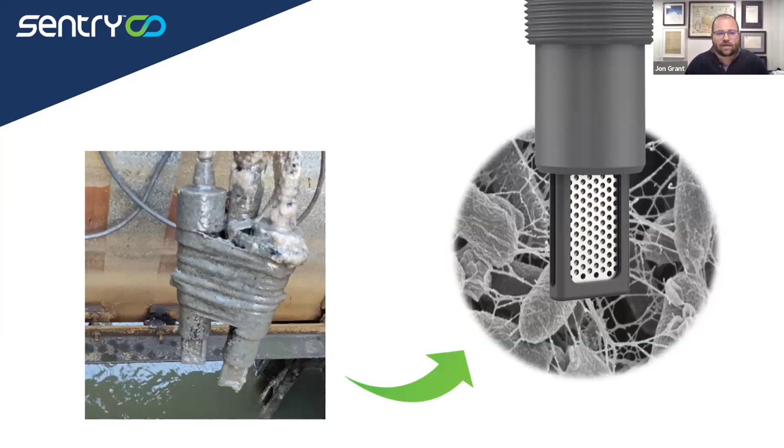And why is that? At its heart, if you look at that's an expanded view of this tip right here, you can see through it. When we think about wastewater treatment, biofilm is consuming carbon. That's all it does for a living. And that powers all biological treatment processes.

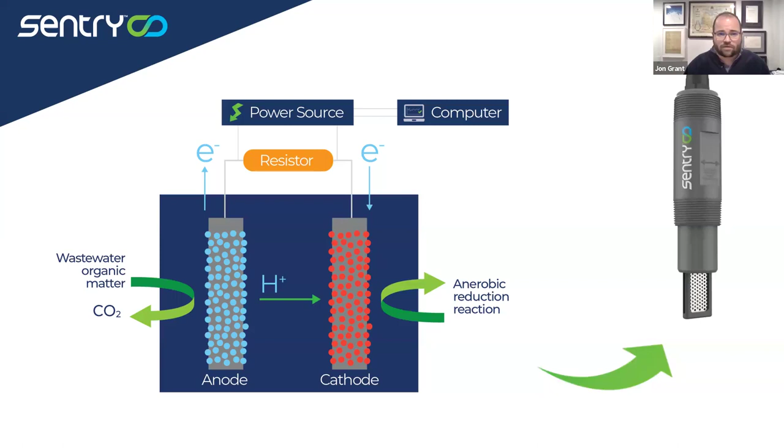What we've done here is, if you look at the architecture and are familiar with microbial fuel cells, this is just a microbial fuel cell where, rather than trying to generate energy from it, we're counting that flow of electrons. As the biofilm consumes carbon, it deposits electrons onto our probe, and we count that—that's how basic biological electrode sensors work. Ultimately it's basically like a Fitbit for your plant's ability to treat the incoming wastewater. That becomes a very powerful tool, and we can talk about how it's being used and applied by a number of different groups globally.

Again, what does a bioelectrode sensor measure? There are so many different ways to measure organics: COD, TOC, BOD5, CBOD5. What this is really measuring is the consumable part of BOD, or in the case of a digester—those are the two main applications: influent variability monitoring and digester optimization.

It's monitoring at what rate the biofilm is consuming food. It does compare very favorably to a BOD5 lab sample—very similar to RBCOD. We've been tested against pretty much every type of organic metric, and where it differs from something like BOD5 is if there's an industrial discharge that's toxic. The lab sample will be the same number, whether there's a toxic shock and an inhibitor or not.

But a bioelectrode sensor will still pick up that the plant is less able to treat the incoming wastewater. So it becomes very powerful for real-time operations and decision-making, almost like a supplemental tool and a way of the biology telling the operators on site or remotely that there's an issue and that possibly a change needs to be made.

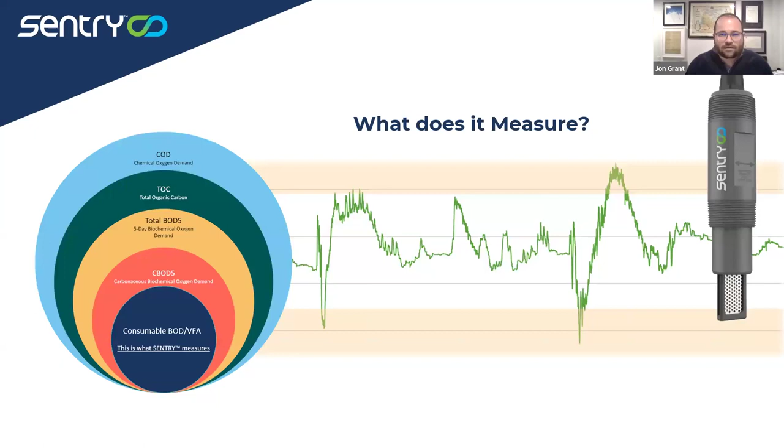So what does it actually look like? This sensor takes a reading once a minute. A normal, happy plant with no industrial discharges, no inflow and infiltration issues, is going to have a nice diurnal trend—kind of like how there's a flow diurnal trend.

But it doesn't take a lot for an industrial discharger to mess up a plant. At our home plant, just near our headquarters in Prince Edward Island, there's a town of 3,000 people, and a microbrewery will throw off their treatment processes. So it doesn't take a lot to knock it off kilter.

This plant right here can very much look like that plant, and the flow is the same. The smell may even be pretty similar, but the outcomes are very different, and it causes the operators and the operations team to possibly get a bunch of flack for something they may not have caused, because you don't always know what's coming into the plant.

One of the fun things we've learned through monitoring around the world is there's one universal truth for almost every wastewater plant in the world: if there's an industrial discharger in there, they will discharge at 4 o'clock on a Friday, and it hits the plant between 5 and 6, and everything goes out of whack—and it messes up your dinner, depending on when you eat dinner.

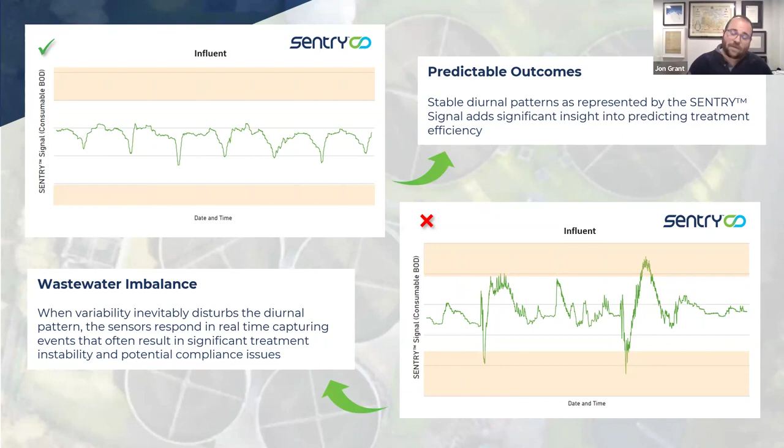So how it's used - there are 3 main places that we've deployed these and seen how they've been effective. If there are a number of industrial dischargers that cause issues, you can put these in collection systems, pre-treatment sites, and lift stations.

They do need power, and they help identify much further in advance what's coming down the line. This has been done in places like Phoenix, and it's going into Salem, Oregon. Singapore PUB is probably the largest such deployment I've seen, with 6 industrial dischargers, 3 lift stations, and then at the headworks. It's interesting to see how a big spike or toxic shock flows through and gets diluted out, but some of them don't, depending on the strength and/or time of day.

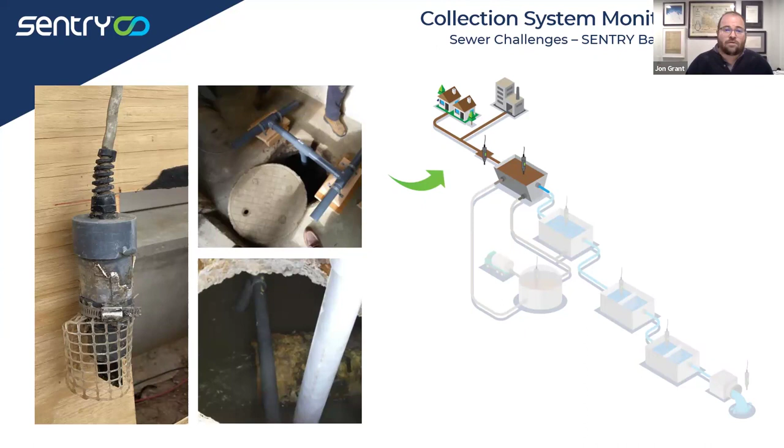So what we're looking at here is industrial dischargers just hammering with toxic shocks, cleanouts of tanks. It could be any sorts of chemicals, heavy metals, things like that.

And then conversely, industrial discharges with organics - we are deployed downstream of a Red Bull plant, and it's very cool to see that Red Bull also gives the biology in the plant wings too. They love it, it supercharges their day.

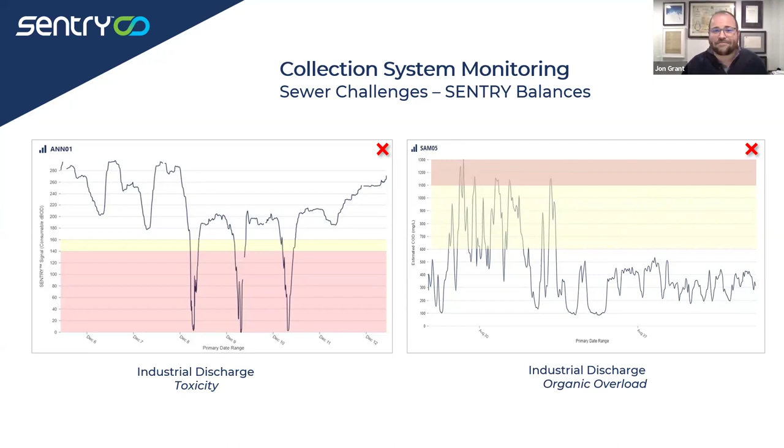Most common use that we've seen is influent monitoring - headworks or primary clarifier, depending on the configuration of the type of plant. Mounted in a tank, mounted in a channel - that's really the best place to monitor for any optimization or understanding of what's coming in, because essentially the clarifier headworks location is the extension of the collection system, but it's also the furthest forward point in the plant.

Great question, Erwin - sorry, I'm seeing that, so I'll throw the answer in right now.

FOG will have an effect on it. I can actually show you how FOG interacts with it, or how FOG additions interact with it with anaerobic digesters. When installing this type of sensor, it's great as long as it doesn't get bags or rags on it, or if there's odor control, ferric dosing, or hydraulic dead zones where FOG can build up, because really they're designed to be in the flow, with the biofilm on the surface able to consume a representative flow. Hopefully that answered your question.

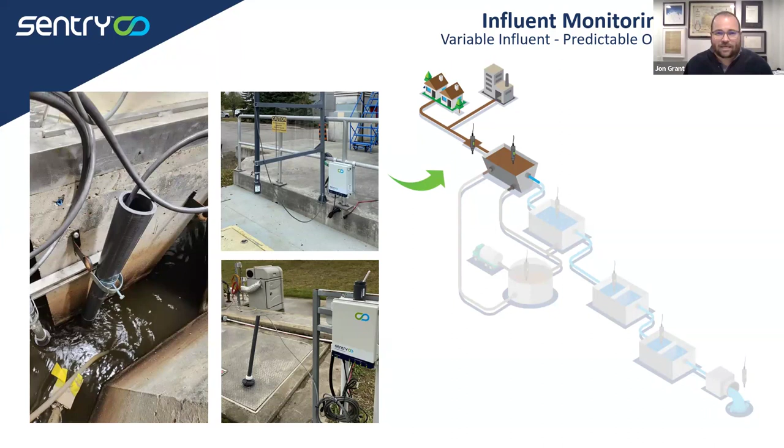So at an influent location, you can see a lot of different types of patterns and different issues - high organic loadings, you can see that spike up. Industrial discharges that have some acute toxicity, you can see that coming down. And then dilution from rain events.

In the standard operating procedures developed by the engineers and folks we've collaborated with, the first question when there's a low signal, to diagnose the issue, is: is it raining? Then there's a series of cascading questions based on whether or not it's raining, and how to treat the incoming wastewater and potentially make changes.

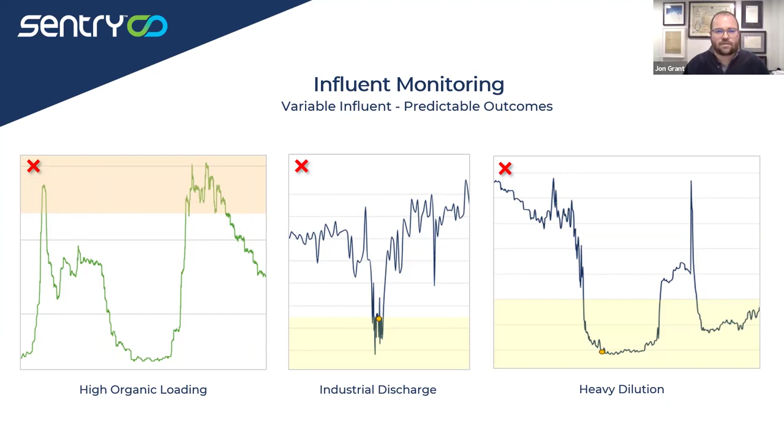Our team, and I'm sure other teams at other groups, are developing machine learning tools to quickly identify what type of issue is coming down and being picked up by the sensor. There's a number of case studies that the groups have used.

I'll dive into the Frankfort one in a little bit, but Sewer Authority Mid-Coastside in California - they're reducing their non-regulatory sampling by 80% because previously they just relied on sampling at 9 a.m. every day. You're going to pick up whatever was happening at 9 a.m. every day, and that may not pick up the things that cause plant issues.

Peterborough, that was a fun one - they're actually just up the road for me. Their plant turned blue, which could be toxic. So their historical method of dealing with that was they'd ramp up aeration, they'd start sampling, they'd change some chemical dosing, but a couple of times we picked up that it was just food coloring from a food production facility, and food coloring has no impact on treatment, so they were able to save quite a bit of cost and time.

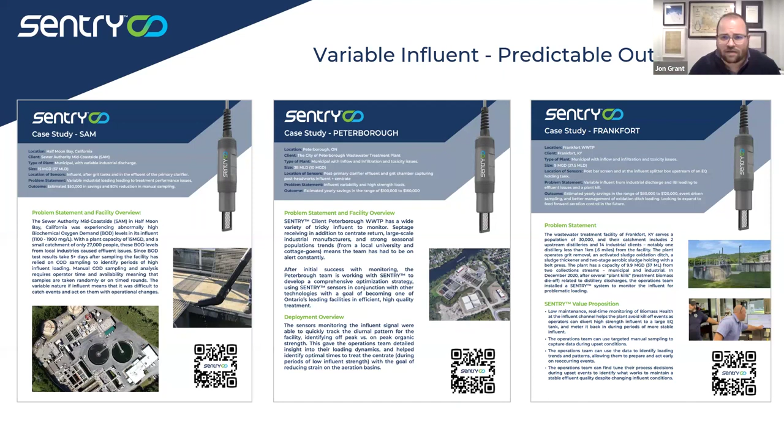And then I'll dive into Frankfort for anyone who likes Buffalo Trace - that's where they make that.

They're also being tied into auto samplers - so this is an ISCO auto sampler, and this is a Hach auto sampler, because it's a challenge to sample when there's actually an issue. That's historically been something where random sampling or composite sampling doesn't actually pick up the acute issues that are happening, and when they're happening, to trace them back to the folks who are sending them down in our catchments.

So the other most common use is digester monitoring, looking at digester health. First off, looking to prevent any souring events, because downtime, souring, and reseeding costs too much money. And the others are then to optimize biogas.

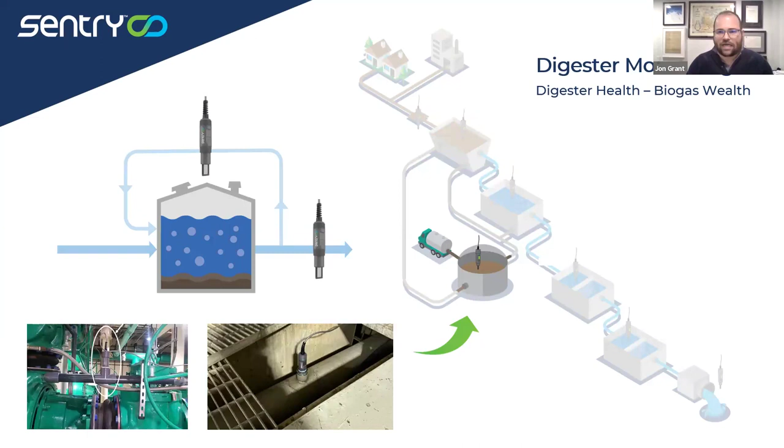This type of sensor is very useful because it's a leading indicator of biogas production, since it's essentially monitoring that consumption of VFA, which allows for a very good understanding of biomass health and whether it can take in the organics currently being discharged to it.

So what that looks like in digester monitoring is this: this is what happened when a system was restarted. Rather than having to load, test, wait three days for a VFA analysis, load, test, wait again, it can be done in more real time. This was done in agricultural digesters, two in Ontario and one in BC, to understand the effect.

The other interesting point is that because it's a leading indicator of biogas production, it's great. As you're driving more and more organics loaded into the digester, those two signals will match. It's when they diverge, when biogas production plateaus and the signal for organic loading still goes up, that's the maximum loading that can be done within a digester.

So then it's all about setting the risk tolerances, 10, 20%, whatever the tolerance is for the specific plant, to a point where it can be monitored and optimize that renewable energy. It's also been used to prevent digester souring events and pick those up earlier than other types of tools.

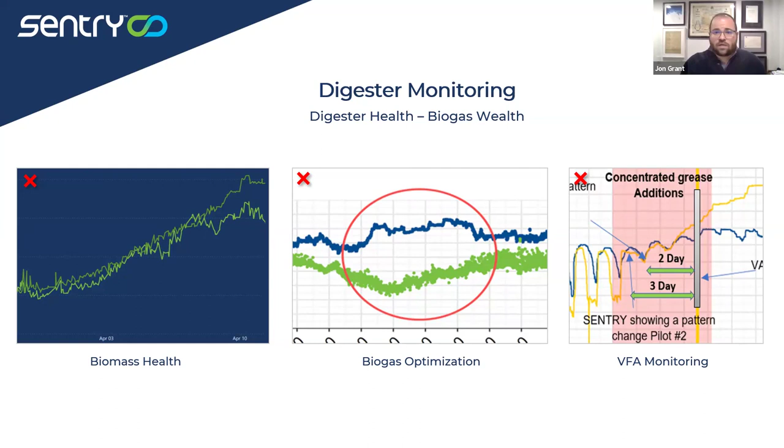In short, when looking at a real-time signal over the course of days, ideally life is good and it's in a good band. But the second that organics start to ramp up within a digester, it's time to start taking corrective actions at a certain point, and immediate actions if it gets to a certain high point, or if toxicity gets in, taking countermeasures to prevent that from destroying the biomass health.

Any questions before I jump into two case studies and how plants like yourselves are using this?

You mentioned something about the fluctuation in near real-time monitoring of signals, I may have missed that. Do you have some of these challenges in terms of fluctuations in the real-time data with the signals, as it were?

Great question. So the fluctuations, it'll pick up whatever food is available to it. What we have seen is, if we're right near a pump, we'll see the pump cycles, the pumps turning on and off. If we're on a recirculation line, we'll see that, because the bugs just want food, the same as how your plant will operate. They'll just want that food.

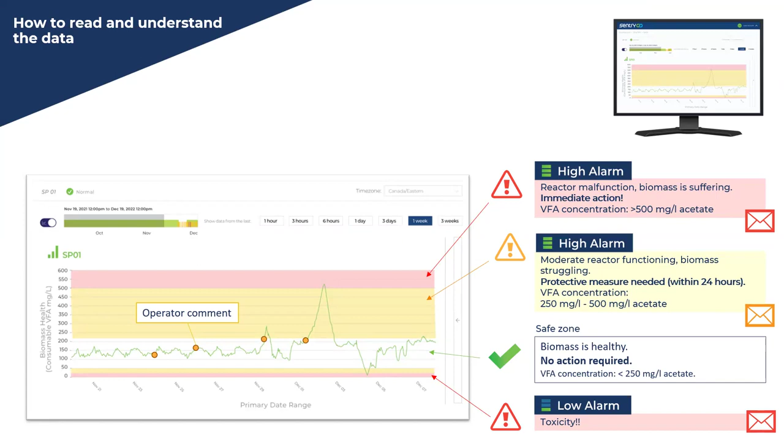Perfect. So let's dive into Frankfort, Kentucky first, and then SAM. Frankfort, Kentucky—not Frankfurt, Germany. When I present this to Germans, they love that. It's home to Buffalo Trace, one of the world's largest bourbon distilleries. Obviously I love the rum down in the Caribbean.

So this plant has 14 industrial dischargers, and Trace is the biggest. They discharge 150 meters or yards from the inlet of the plant. It's a town of about 30,000 people. They do have other dischargers, but really just one massive one.

So what happened for them was, about two months before we started working with them, they had a plant kill. Trace discharged something—they didn't inform the plant, or forgot to. There are varying stories on why the plant wasn't informed. But the plant manager walked in and could already smell and see that his plant was killed. And so for two and a half weeks, they were in violation.

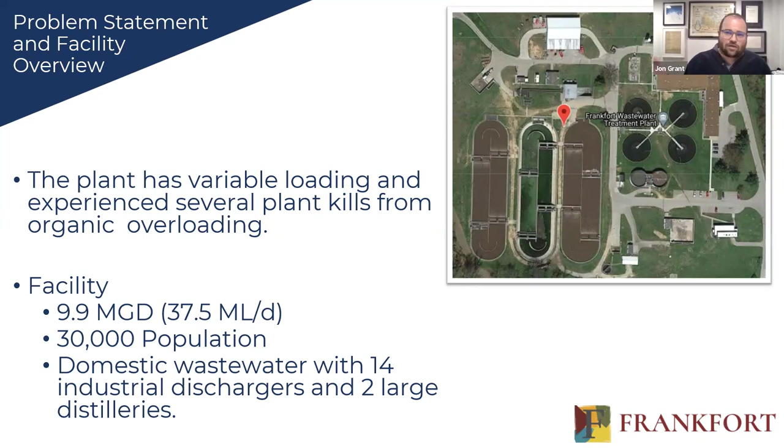So he talked to a partner of ours, and the rationale for looking at BES was the reliability and real-time monitoring to optimize their sampling, identify their loading trends, and then fine-tune some process decisions as well.

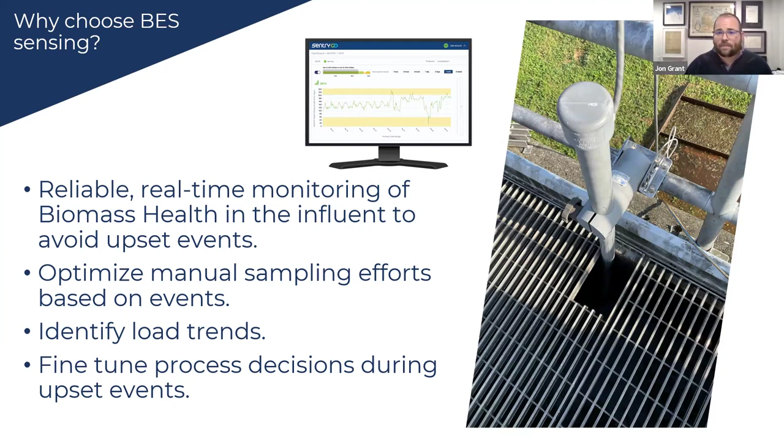And what this helped them do was the ability to see what was coming down from the distillery. So a small spike here from a discharge, fine. A big organic overload there, that's indicative of something that would actually cause them quite a bit of issue.

And this plant suffers quite a bit from rain dilution, though it's funny because they also suffer from snow melt. Probably not an issue for anyone here. But there was one time early on when we were deployed with them in the spring where we called them up and said, is it raining at this plant? And the comment was, no, it's warmer and all the snow is melting.

They also, in the first week or first month of working with them, had a big issue every Wednesday at noon. The reason they were having this issue every Wednesday at noon was because they were taking in landfill leachate at one of their lift stations, and the collection systems team wasn't talking with the plant team, so no one knew that.

They were also cleaning out their EQ tank at the same time, so they were basically double hitting themselves, and they couldn't figure out what was happening or why they were having these issues until they were able to sit down and have that conversation with the whole team and say, what's happening at 12 o'clock? So they shifted the landfill leachate receiving to a different time, and that enabled them to smooth things out and not have to spend more energy and consumables on treating it effectively.

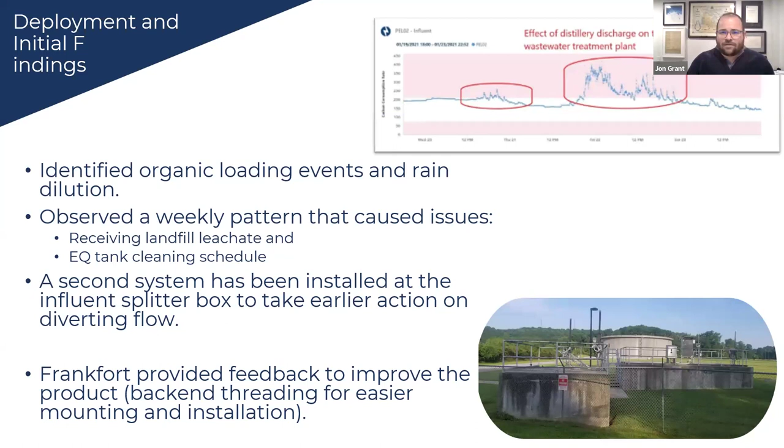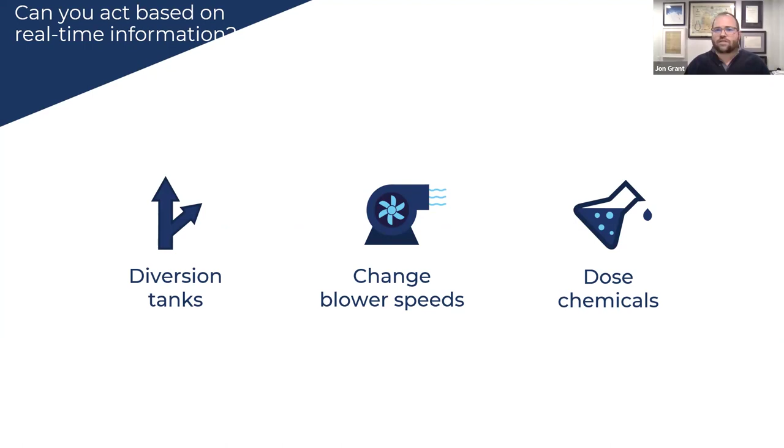All right, so typical uses: they will divert, change their blower speeds in their oxidation ditch, dose different chemicals. With this plant, and there's Carl, their plant superintendent, looking at the dashboard, they found that they were able to manage their oxidation ditch more effectively, and they're in the process of looking into feed forward aeration control to further optimize that. They're saving about $100,000 a year through using this tool, and they're also looking to put one right at the outflow of some of their larger dischargers like Buffalo Trace.

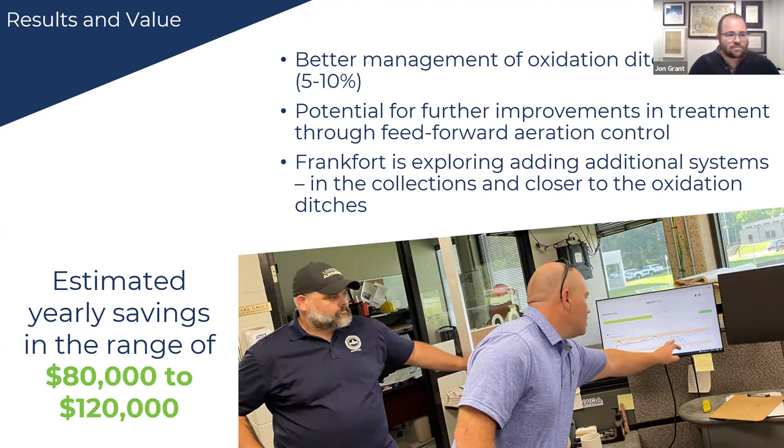I'll hop into any questions on that, or I can hop into a case study on co-digestion and the use in AD. Hearing none.

Great. So Central Marin Sanitation Agency, that's based in California near San Francisco. The plant as a whole began operations in 1985. They've got two 1 MGD mesophilic digesters, and they have a strategic power delivery program. Their entire goal when they upgraded to co-digestion a few years ago was, one, to be self-sufficient in production of energy, and two, to sell excess energy onto the grid. California has had issues historically with brownouts and lack of reliable energy, so this was another way to continue to add energy to the grid and provide a source of extra income for the municipal treatment plant.

It's no secret that every treatment plant in the world could use more money, and so they're able to use that to supplement their cost of operations and improve their plant more, or at least that was their goal. We'll get to the point where they are able to do that. We've been working with them for 4.5 years now.

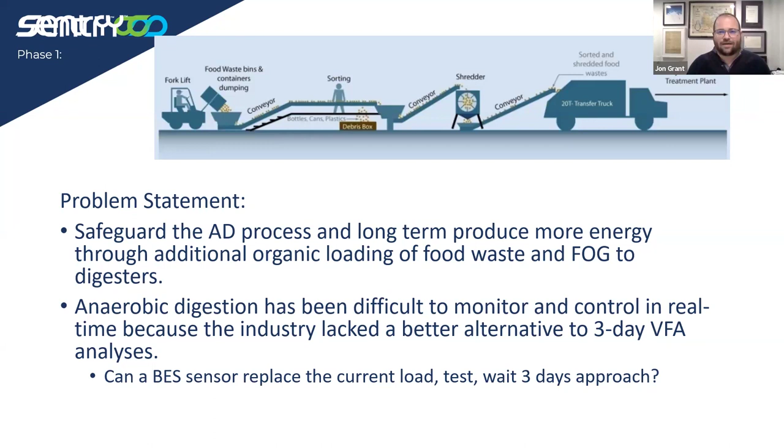In the first phase, it was to identify if these sensors could be used to protect biomass health, and then see if it could help monitor organic loading in real time. The second phase was to use the sensors to monitor that loading in real time and begin to load more organics. We're past phase 2 now, and we're moving into phase 3 to understand if digesters can possibly be loaded beyond the 50% more loading they've been able to achieve through real-time monitoring.

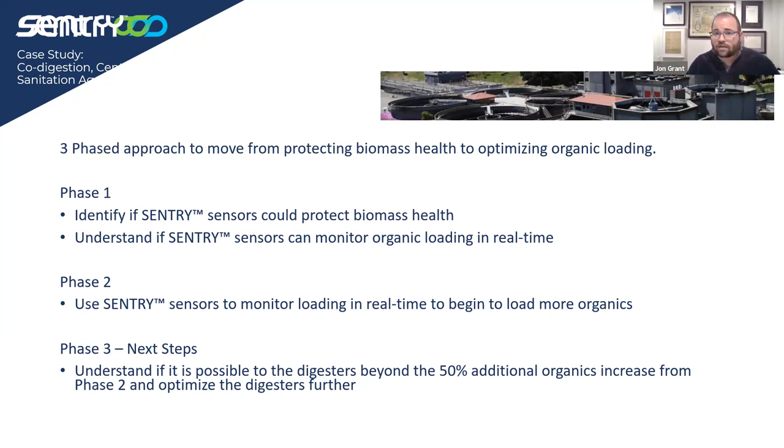In the first phase, they put 2 probes on the 2 pilot digesters. Pilot digesters are much safer to play around with than the real ones. They were deliberately trying to overload and sour the digester with organic loading.

What you're seeing here are the 2 digesters, loading, consuming all the food overnight, loading again, and the bioelectrode sensor picked up 3 days in advance of VFA that something was off. Looking back, it likely would have been earlier, because even though the peaks remain the same, if you look, the troughs are trending upwards. So what it's saying is that the biomass is struggling to recover and is starting to take on issues.

This one was fed all the way through just to confirm, and you can see that they went pretty off. But that gave the confidence that this type of technology could be used to help monitor that.

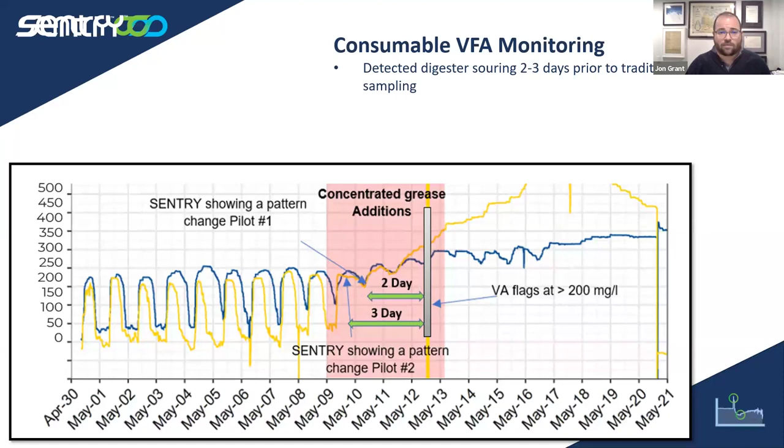We're naturally conservative because we have to be with digesters and wastewater treatment in general. But with digesters, if you get it wrong, there are so many issues you can have that it's not worth getting it wrong. So typically, digesters are loaded 30% less than they could be because of that risk tolerance.

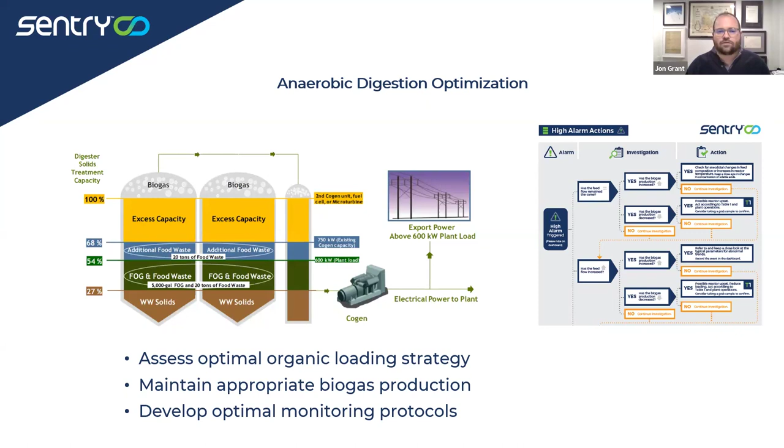The next phase was basically moving to phase 2, assessing the loading strategy and developing custom operating procedures for that site, to really maintain biogas production. Sensors were able to proactively identify instability, and again show that they could, at the very least, protect against digester failure and downtime.

Then, as they moved to the full-scale digesters, the goal was to increase organic loading to divert organic waste from landfills and ultimately generate biogas. So it's almost a double win: getting paid tipping fees for taking in truckloads of organic waste, and also generating excess electricity.

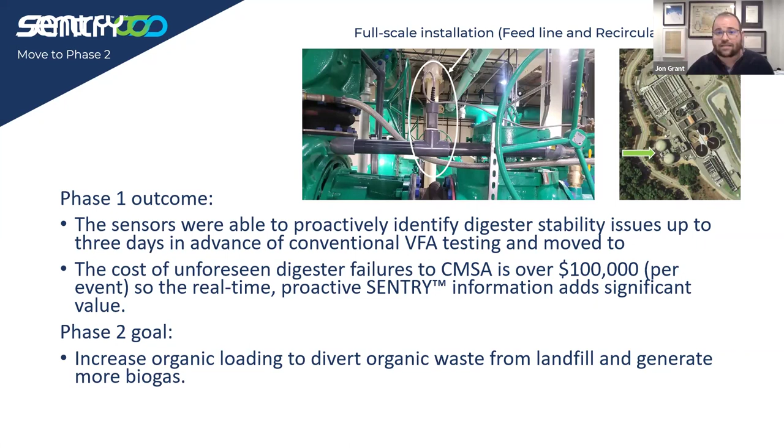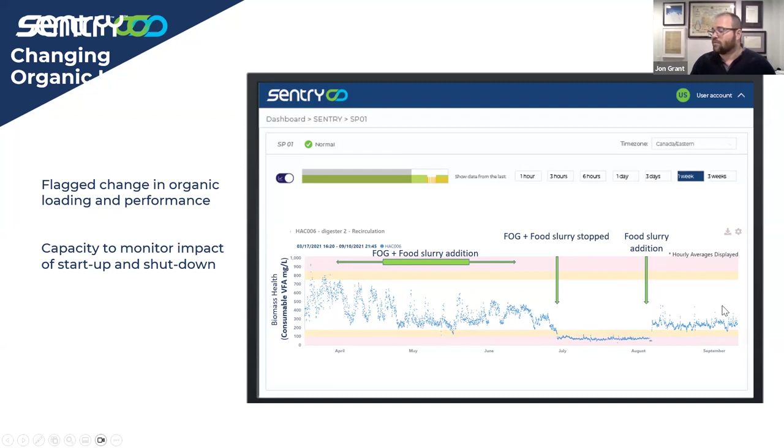If that was all that was coming in, you'd never have much variability. But again, the goal was to increase organics addition to generate more biogas. So they started doing it again, with just the food slurry at first, to start getting a good baseline of how to ensure they're starting this up effectively.

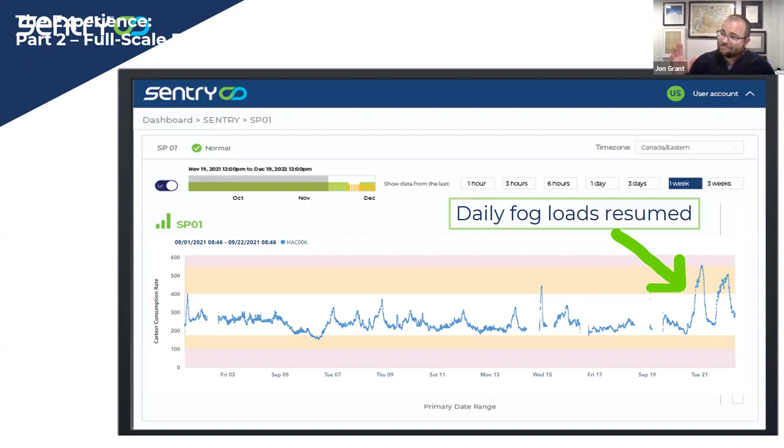Then this is a more granular look. They started to load fog again, and you can see that the biology and biomass within there likes to eat fog, it's much more active. Taking that one step further, they started loading one fog load every three days, and then began to take in one truck of fog per day, which allowed them to have that trust to push through.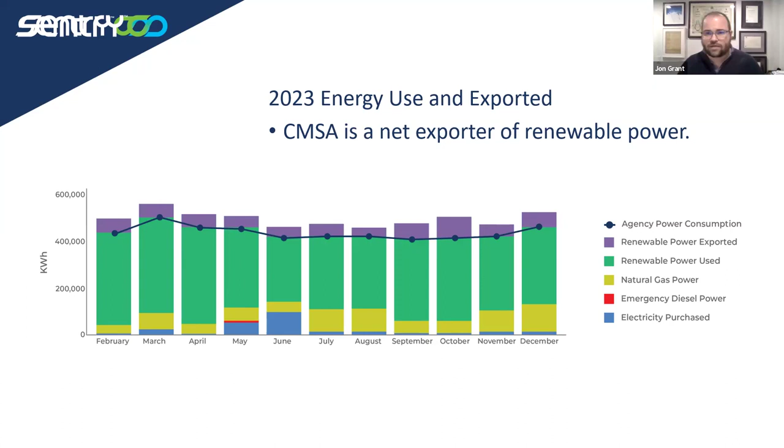So we're a few years on, and now they're able to say that they've been loading 30 to 50% more organics for a year, producing quite a bit more renewable power that they can export. The green line is the renewable power used, and the purple is the power they're able to export. The majority of their power is coming from these digesters, allowing them to sell back onto the grid.

So the ultimate outcome was: phase one, cost of downtime imbalance, $100,000 able to protect. Phase two, in conjunction with Stanford University, able to increase organic loading 30 to 50%, which led to a doubling of biogas production and about $600,000 in additional energy, either through not having to buy energy or selling it onto the grid.

So any questions there? Those are the two case studies. Happy to chat about those. A few slides left, and then we can take more questions.

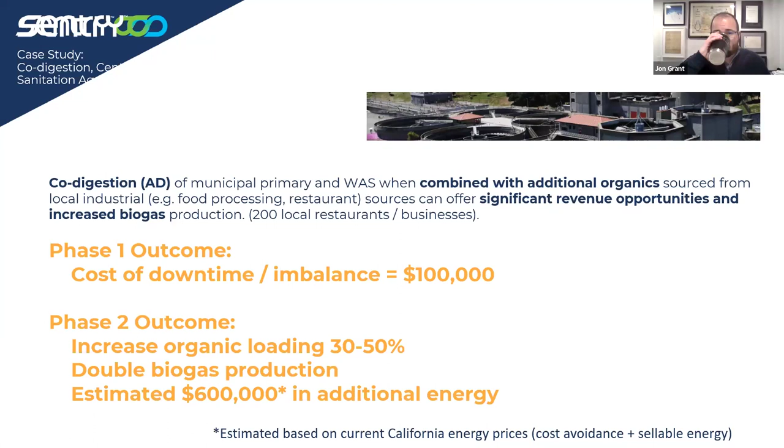Seeing none. So they're easy to install. I've installed them before, and anyone will tell you that means it's pretty easy. It plugs into a wall outlet, so standard North American plug.

The second that happens, the universal SIM card starts sending information to the cloud, and you're able to see that data live in real time. The most typical installations are either tank or channel mount, or threaded into a pipe. I've installed them in 35-40 minutes, which again speaks to how easy they are to use.

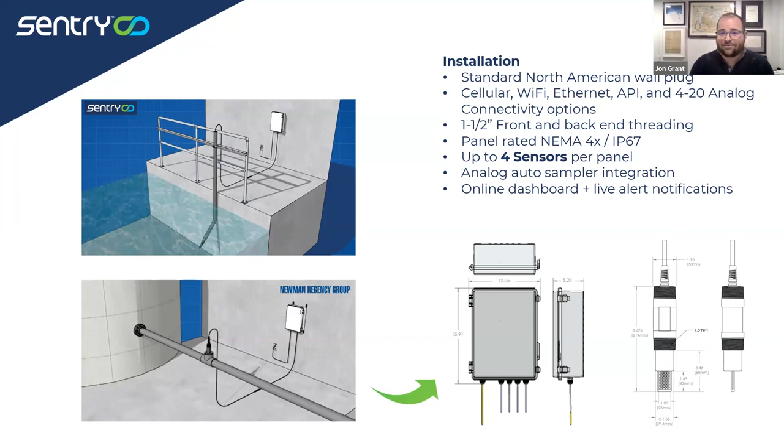A standard system comes with two sensors, because that way you can look at the beginning and end of a process and see how the treatment performed. It goes back to the roots of wanting to monitor a package treatment plant at the influent and see how that performed at the effluent, when it was out in the desert in Algeria, and being able to monitor that back in Canada.

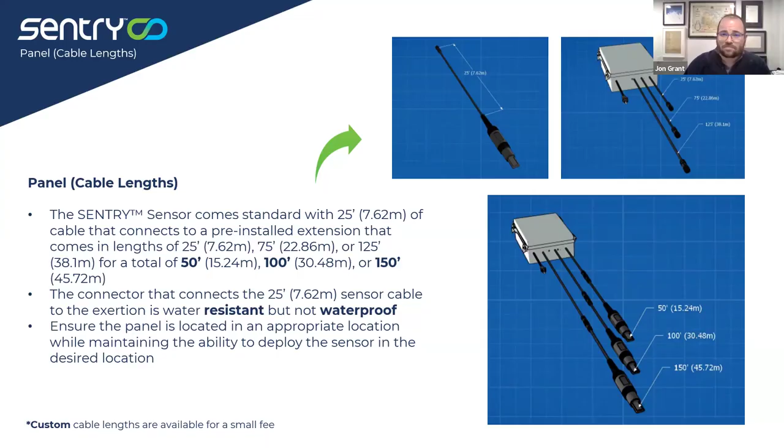So you get quite a good wingspan, in terms of 150 feet in any direction with cable lengths. Like I said, installation's a breeze.

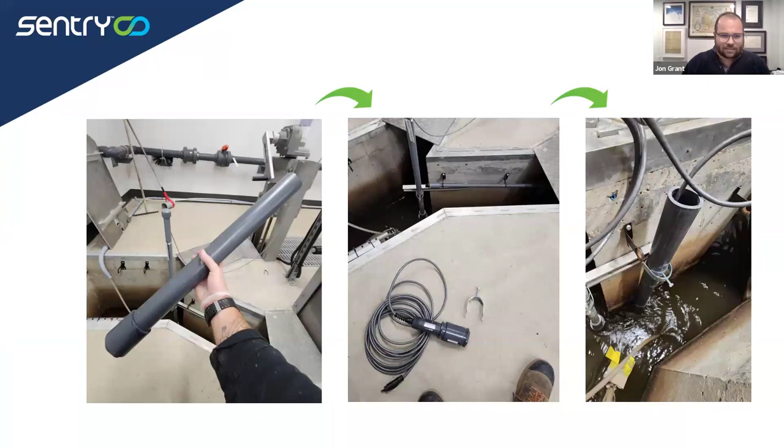And cleaning is the key thing. Like I said earlier, this type of sensor wants to be in wastewater. If, however, you get something metallic lodged between the two electrodes, the easiest way to clean it is squirt water between the two electrodes and get that out of there. Otherwise, we send a box of toothpicks inside the panel, which, if we forget to tell people, leads to a bunch of questions as to why we're sending toothpicks to a wastewater plant.

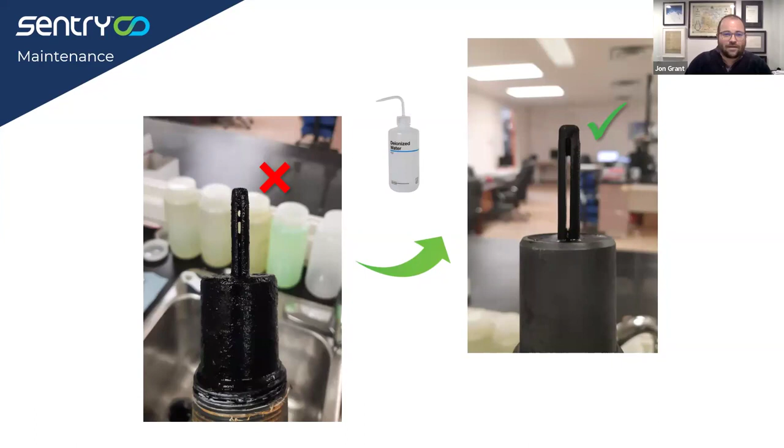Yeah, it's being used in quite a few applications. Aeration optimization - we're doing some feed-forward aeration optimization with a few partners. Nutrient management, effluent monitoring, auto sampling, industrial discharges, and starting to develop more on the machine learning and AI insights and reporting with ourselves and partners.

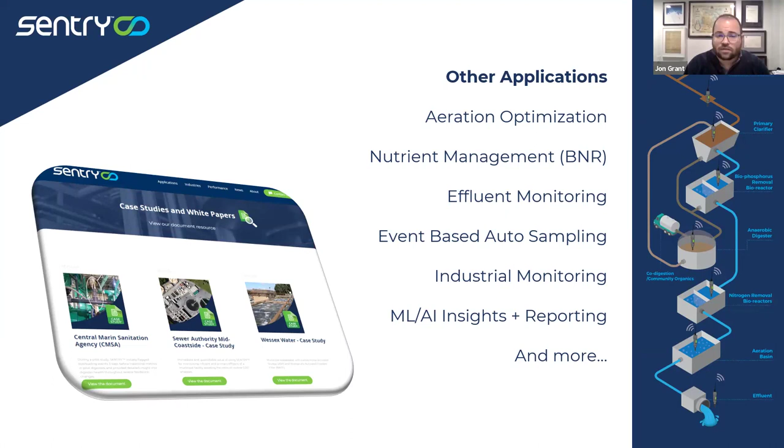Yeah, I mean this is just a quick - I'll skip over that, but essentially when this is deployed, it's deployed with the equipment, but also training online through smart people like Iker, who's on the call. They essentially act as an always-on person to support your operations team in making decisions, because there's 6 or 7 people on our team who all day, every day think about this signal.

Every treatment plant is unique, but the problems that treatment plants face happen quite often across the world. So there are some really smart people that work in this field that folks we collaborate with are able to call on at any given time. So that's about it - the goal is to know early so you can act. Happy to take some questions, and thank you for having me.

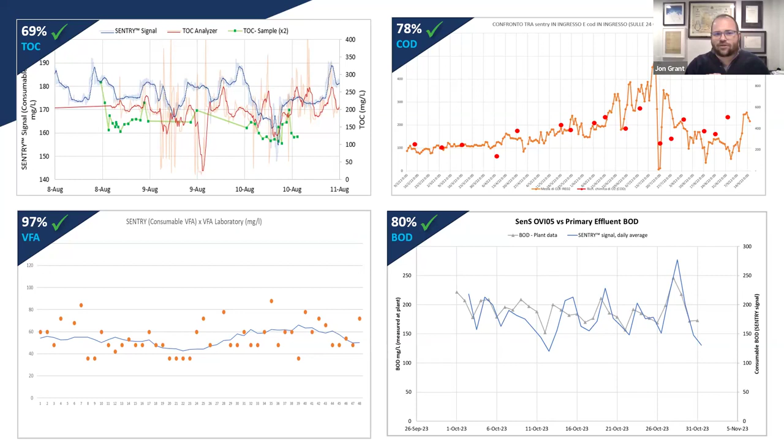Did that answer the question? I went a bit more in depth. I can show you the longer deployment here, where you can see the screen grab of the two sensors moving in lockstep after they were deployed. That was the one I was discussing early in the presentation.

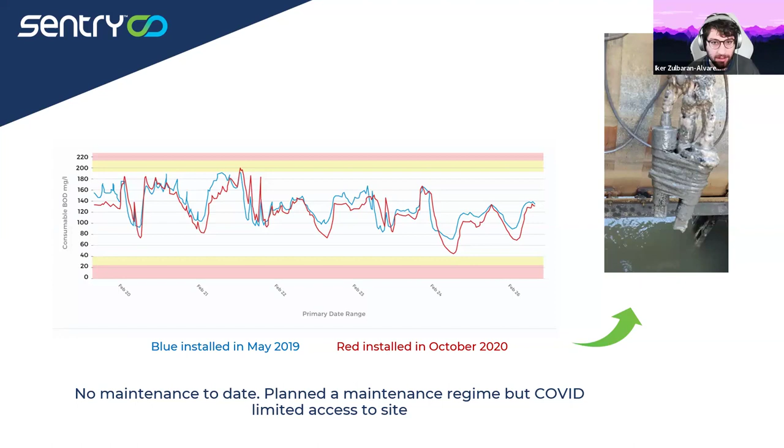Iker has also responded to a question in the chat asking could you review the application in activated sludge. For organic loading detection and trends, figure out if there are high loads of organics or toxic materials on its way to the basins. That's basically what Jon explained, just put into words.

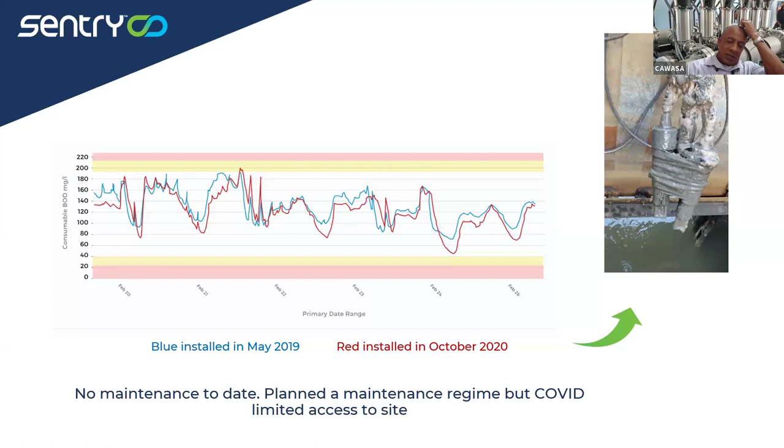You've had quite a bit on traditional mechanical treatment plants. Would that mechanism work in the case of some nature-based systems, such as a constructed wetland? Of course, we'd have to do effluent testing before the water is released into the natural environment.

Great question. We've done some lagoons at pulp and paper facilities. The short answer is yes, we could do it. It's robust and reliable. We've had them outside in northern Canadian pulp and paper lagoons, and we monitor a couple of lakes in Florida that are used for recreation. The question would be what changes could be made based on the signal, whether it's loading alterations or anything like that. I'd be happy to discuss that and whether we'd be the right fit for the economics of that circumstance.

We're pretty open and honest. If we don't think it's going to work, we're happy to say no and try to recommend a better solution.